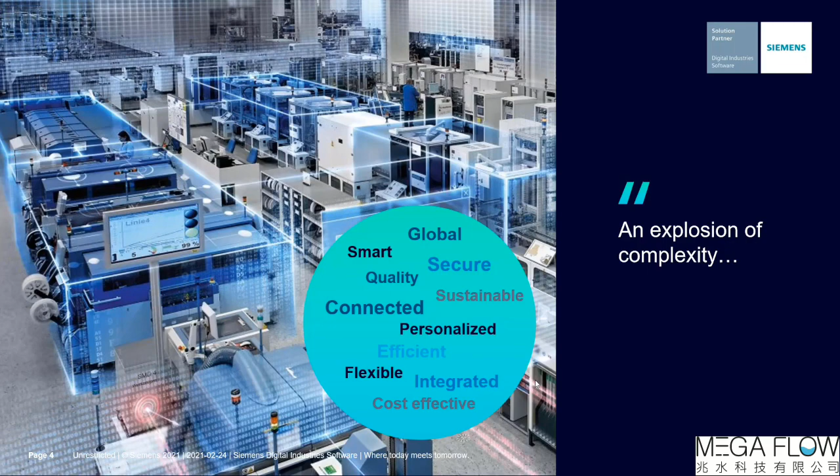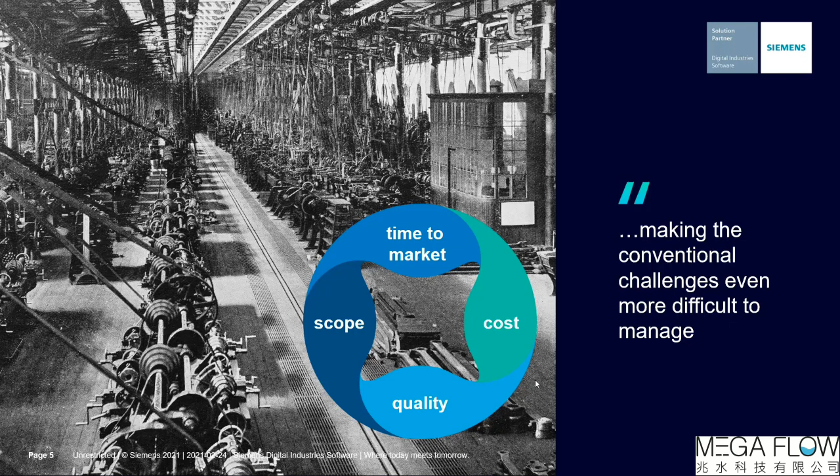Therefore, product innovation is at an all-time high, and we are confronted by an explosion of complexity to cope with those expectations. Compounding the situation are the conventional pressures of time, scope, quality, and cost. However, in the face of increasing complexity, these pressures are even more challenging to navigate. So what does this mean to the business of engineering? To quote Lee Iacocca, an engineer and leader, organizations constantly face seemingly insurmountable problems, but these also represent great opportunities.

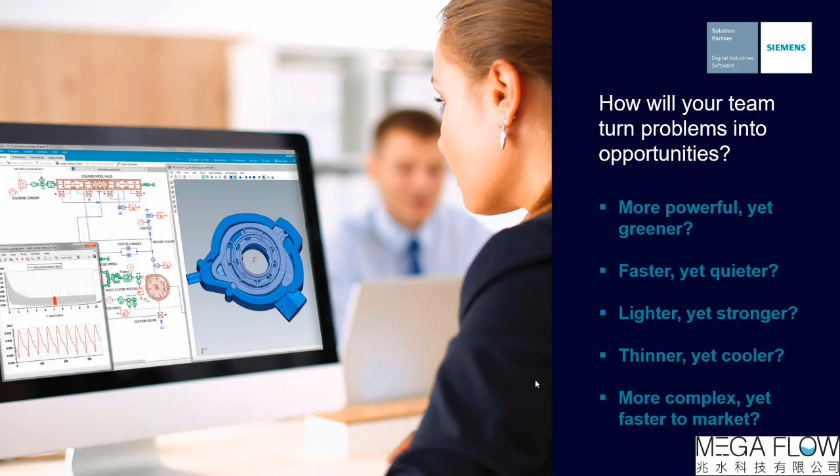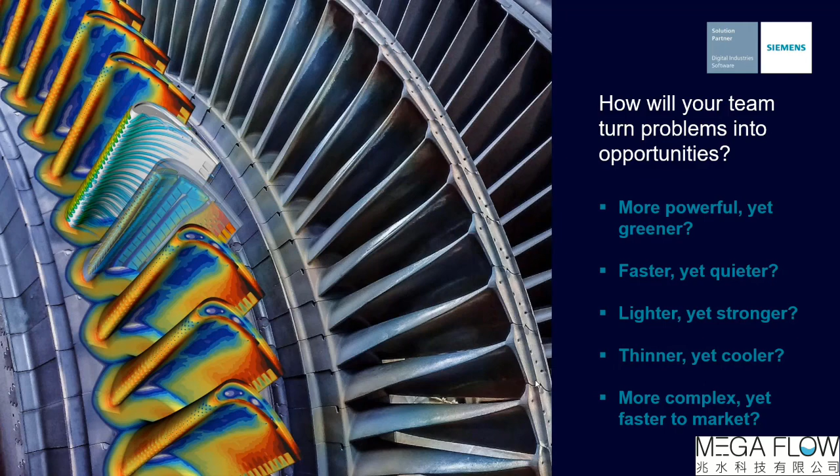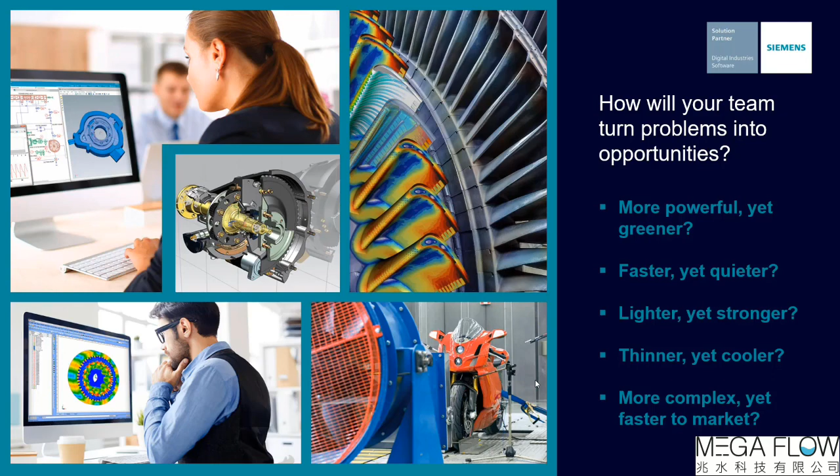So now let's move on to the next section, a new way forward. Extending that thought to your organization, you and your teams are faced with many challenges, engineering trade-offs that may seem impossible to solve, making your product more powerful yet consume less energy, making your product faster yet reducing the noise level, making it thinner yet cooler, making it more complex yet get it to market faster. So how will you navigate these trade-offs and answer the tough questions to bring innovations to market faster, despite the increased complexity?

Answering these questions requires solutions that can help predict and improve performance. This is what brings the digital twin to life. Hence, we consider simulation and test the beating heart of the digital twin. Simcenter is a flexible, open, and scalable portfolio of the best predictive tools on the market. Simcenter FloEFD is a part of this outstanding portfolio, which covers the full breadth of engineering methodologies.

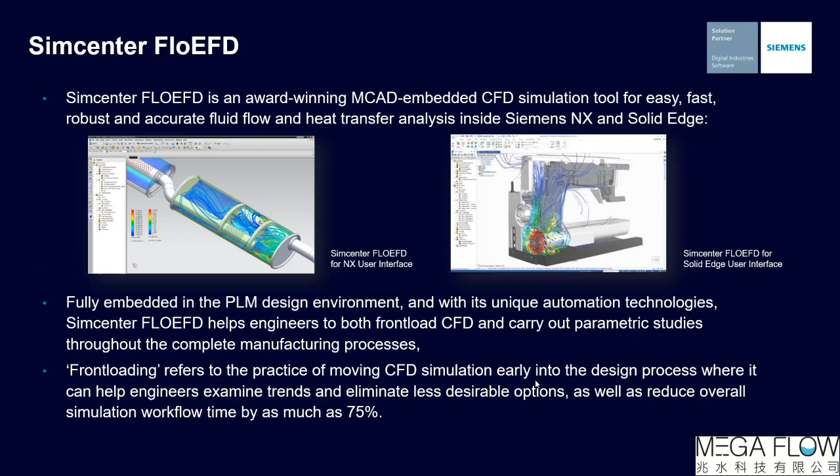So, what exactly is FloEFD? Simcenter FloEFD is a front-loading, multi-CAD embedded CFD tool for designers. Front-loading is the concept of performing your simulations earlier in the design cycle to maximize the impact and catch issues before the late-stage validation phase. It is fully embedded in the PLM design environment and has unique automation technologies.

FloEFD is a general-purpose tool which can be used in a wide range of flow and heat transfer problems. It has been specifically developed for non-CFD specialists to use to get fast, accurate results. The Mesher and Solver have unique proprietary technologies which facilitate the streamlined CAD-embedded analysis approach of this product. The result is a drastic reduction in barrier to entry and overall CFD simulation time.

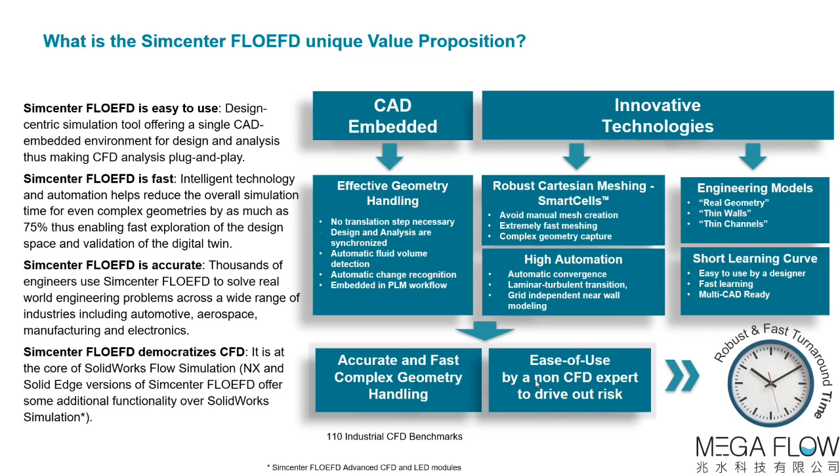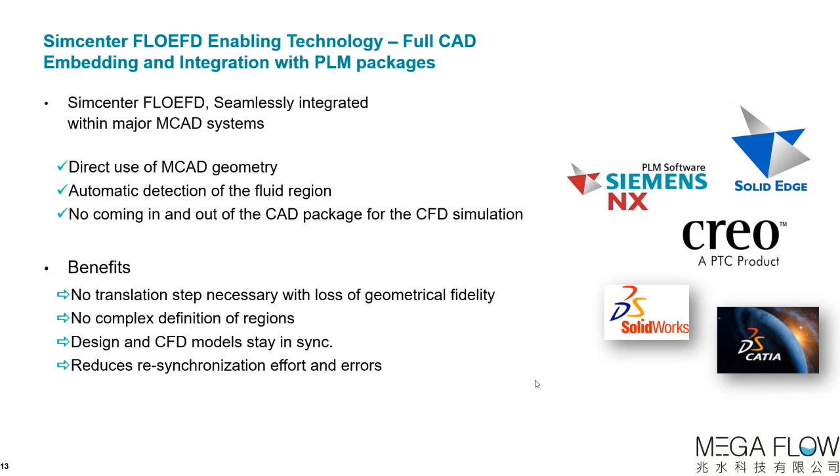We have seamless integration with Dassault CATIA V5, PTC Creo, NX, and Dassault SolidWorks. We also have links to the Inventor and Solid Edge environments. We'll be looking at the NX version in this demo, but the process is identical for other MCAD systems. The benefit of this is that there is no translation from the CAD model. Any CAD design changes are instantly reflected in the CFD analysis. Synchronization of CAD and CFD becomes a non-issue.

So now let's dive into predictive engineering analytics with FloEFD. We will walk you through 6 steps in the simulation process over the next 15 to 20 minutes. We will use FloEFD to analyze an IGBT liquid-cooled module, which can typically be found in an electric vehicle or renewable energy applications. These modules are used when large amounts of current need to be switched on and off rapidly to control a motor, for example.

The process will be geometry manipulation with the NX integration, analysis setup, meshing, solve, review the results of the analysis, and then optimize the original design and quickly create a new best simulation. So now let's see how FloEFD can improve your innovation process.

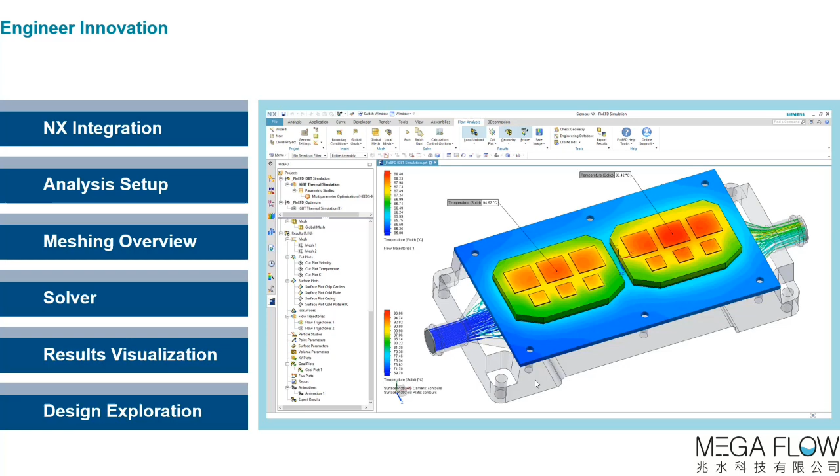The first step to be covered is the NX integration. FloEFD is natively embedded in Siemens NX. We support the latest versions of NX all the way back to NX7. This means there is no need to transfer geometry from CAD to a CFD tool.

All of the assembly and part parametric definitions are maintained, so modifications can be made easily. This is especially powerful when it comes to optimizing the geometry. Compare this with using neutral file formats like STEP, where all parameters are stripped out and you're left with a dumb solid. The fluid region is automatically detected based on an internal flow region, and this is updated with geometrical changes also. The image shows the water region detected by FloEFD.

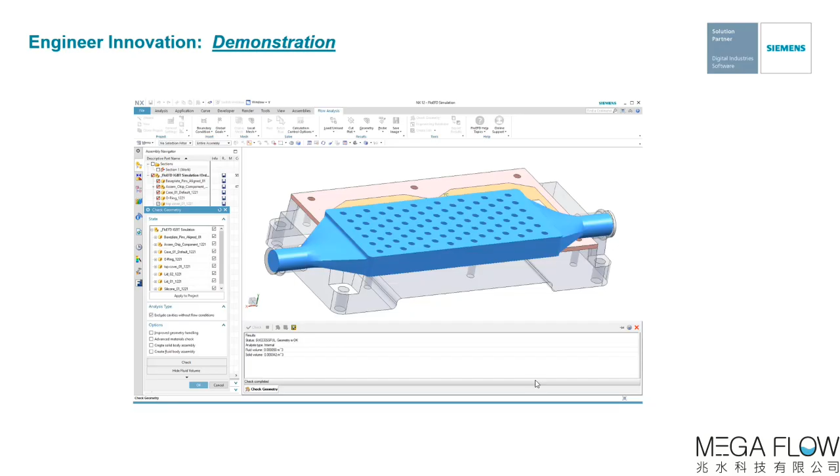Let's look at some of those features in FloEFD. So now let's go on to the live demonstration. Here is the NX interface in modeling mode currently. If we explode the assembly, we can see the parts which make up the IGBT cooler. It's important to model all the materials in the thermal path from the semiconductor to the fluid.

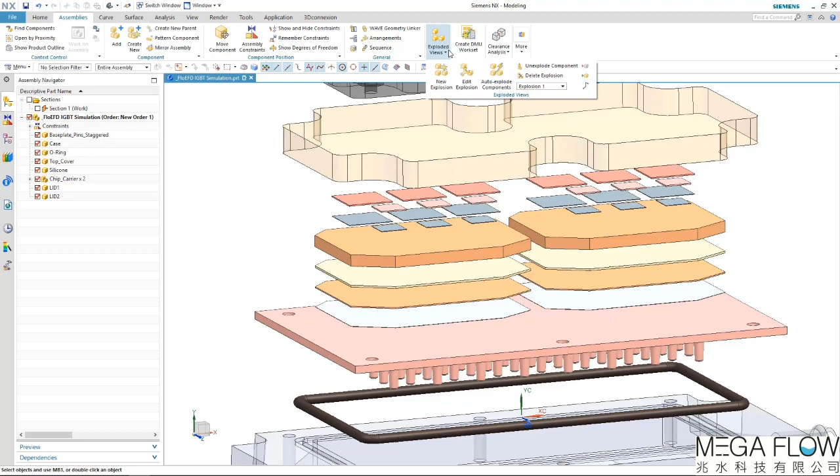We can see the silicon, the solder, the copper chip carrier, and the thermal paste attaching the chip carrier to the base plate. The casing is made of aluminum, and the whole assembly is designed to operate in vehicle underhood conditions. There is the addition of lids, which serve the purpose of closing the water region and for applying flow boundary conditions.

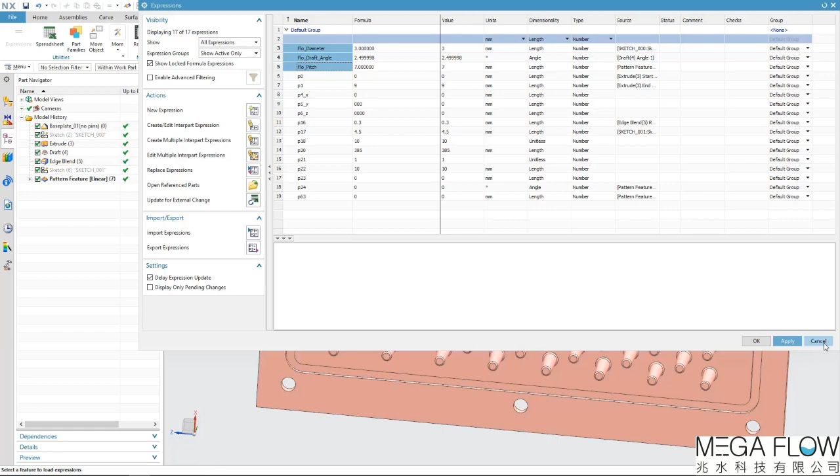Let's look at the copper base plate in more detail. If we open the part, we can see it's been designed very simply in NX using an educated guess for its predicted performance. Looking at the NX expressions, we can see there are 3 parameters controlling the heatsink pin width, draft, and pattern spacing. The model has been designed this way with later optimization in mind.

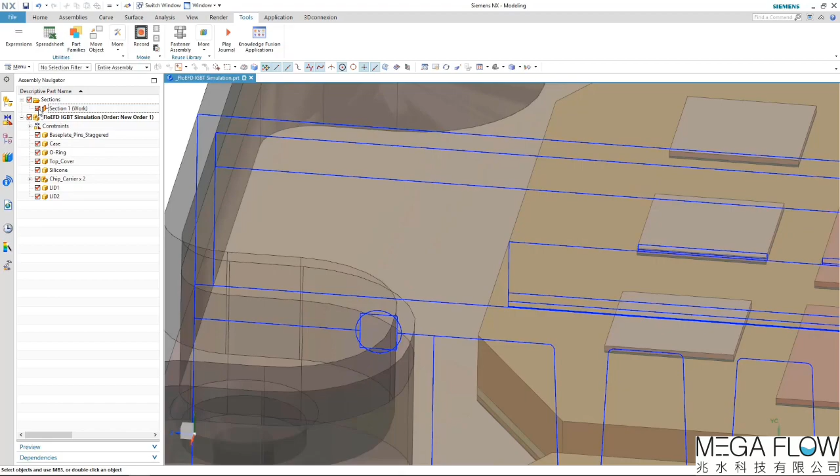Jumping back to the main assembly and taking a cross-section, we can see there are some geometrical overlaps between the parts around the O-ring and silicone potting compound. FloEFD has no issue with overlapping and dirty geometry. There is no need to spend time fixing this, just be careful with material priorities.

FloEFD is started from the menu tree under Simulation. This starts FloEFD mode and checks out the license. We can see the addition of the Flow Analysis ribbon toolbar, which is used to control the analysis. The lids on the inlet and outlet can be created automatically using the Create Lids tool.

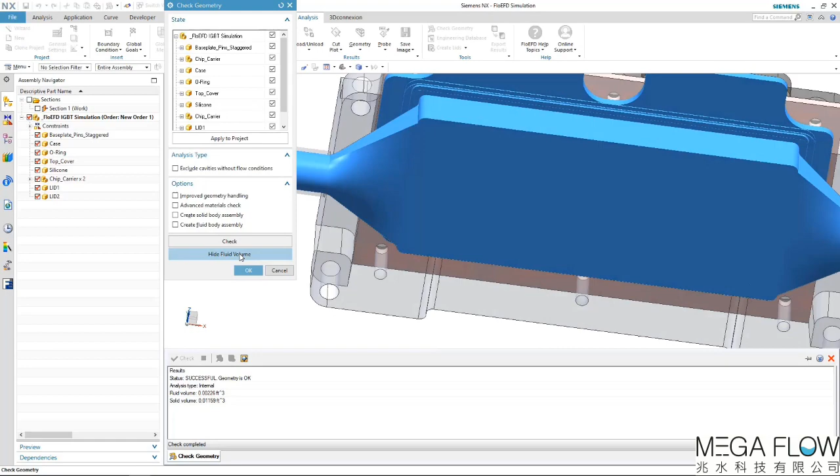Finally, let's use the FloEFD Check Geometry functionality to check the fluid region. Clicking on the Show Fluid Volume button will highlight on the screen where the fluid regions are. There are some small enclosed volumes around the O-ring which can be ignored later, but the main flow region has been detected correctly. This fluid volume part doesn't need to be created in NX. It is automatically created and updated. The geometry is now ready for FloEFD analysis.

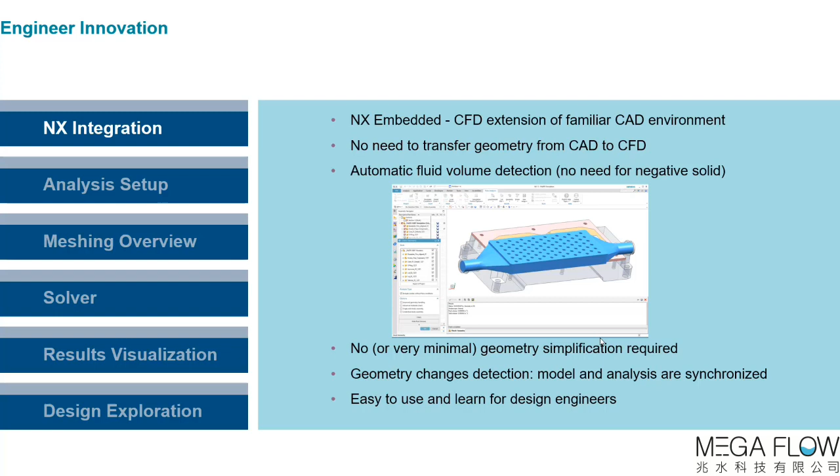So the benefits of having an NX embedded approach are that there is none or minimal geometry simplification necessary. Geometry changes are detected and the project is updated automatically. The tool is easy to use for existing NX users as it's just an extension of the CAD tool.

So what we just saw was the NX embedded nature of the software and how designers can leverage pre-existing NX models to perform a CFD analysis. The familiarity of the NX interface and FloEFD being a logical extension makes the tool easy to use for the NX designer.

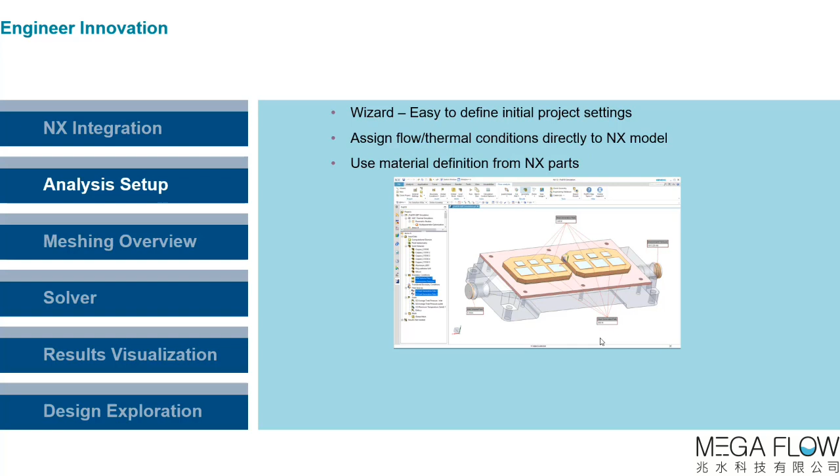So now that we have prepared and checked the geometry, we're ready to set up an analysis on the assembly. The FloEFD project is created using a wizard-driven process. Flow and thermal boundary conditions are applied directly onto the NX parts. If materials have been applied in NX, these can be imported directly into the FloEFD engineering database. So now let's go on to the live demonstration.

Let's start the wizard and look at the steps. The first step is to name the project. We can also see that the project can be created on the NX family of assembly members if needed. This project is an internal analysis, as the inlets and outlets are well defined. The exclude cavities without flow conditions option is enabled to ignore the previously seen cavities.

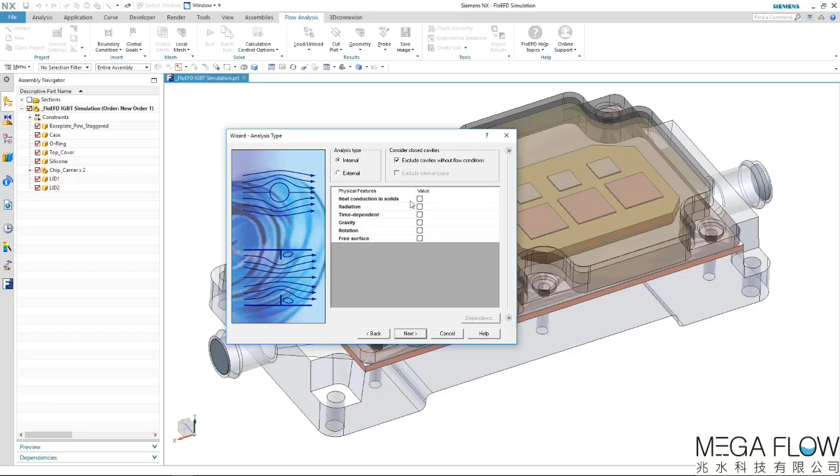Heat conduction in solids is enabled to consider conduction and convection. Water is chosen as the working fluid. The wall conditions are left at adiabatic to ensure all heat is transferred to the water. The ambient temperature is set to 65 C to replicate under-hood conditions.

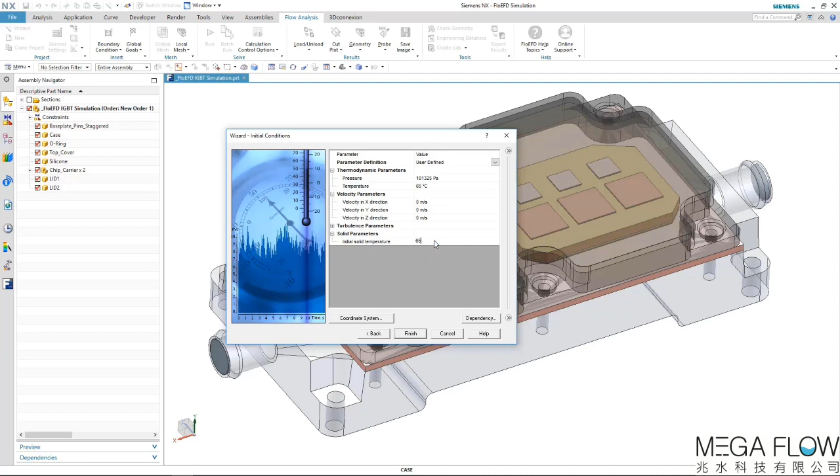Once the wizard is finished, we can see the computational domain around the assembly, which has been sized automatically based on the wizard selections. Let's quickly import all the NX materials which have been assigned. The assembly is scanned and we can accept the detections.

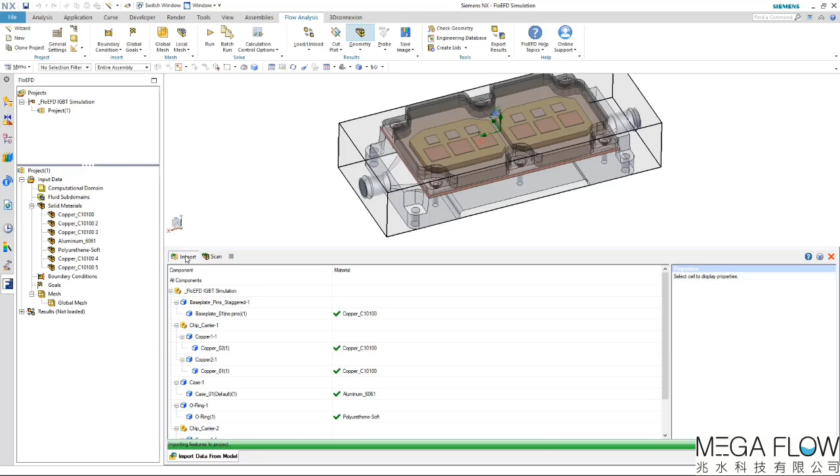Materials can also be applied manually. Here we're applying silicon on the chips themselves from the independent FloEFD materials library. This is useful as not all NX material definitions have temperature-dependent properties.

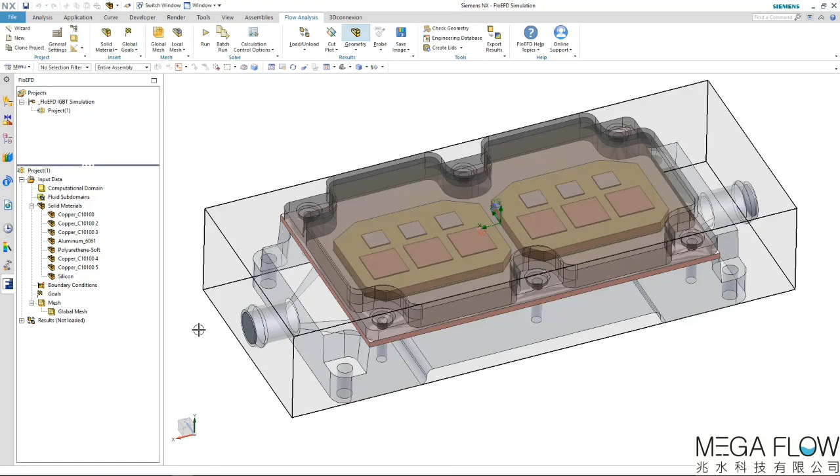Next, we'd like to assign the water flow conditions using a boundary condition from the ribbon. A volume flow rate of 1.5 gallons per minute is applied to the inner face of the lid we created earlier. The thermodynamic properties show the inlet water temperature of 65 C.

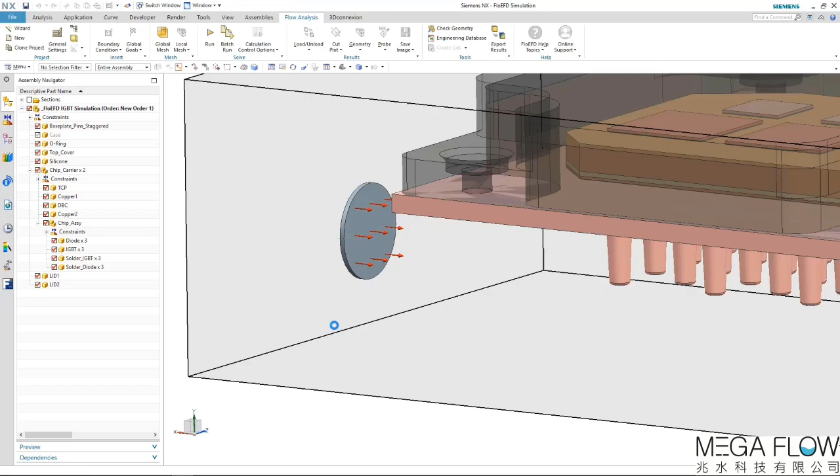In a similar manner, an outlet pressure condition is applied to the other lid. This will allow the water to leave the system and gives a known pressure condition.

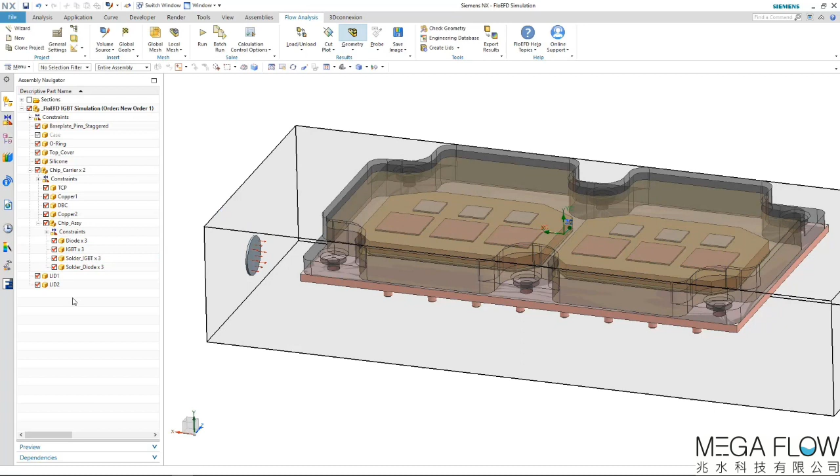A volume source is used to apply a heat load. Multiple parts can be selected at once and the power will be split across the bodies. We'll apply 360 watts on the IGBTs and 144 watts on the protection diodes. Like this, other FloEFD features can be applied directly onto the NX geometry.

The FloEFD project is initialized with a wizard and can be applied at any stage of the design process. The engineering database can be shared across a team to ensure consistency. FloEFD data can be reused and persistently associated with a part if desired. Projects can be cloned and templates created to standardize the analysis setup stage.

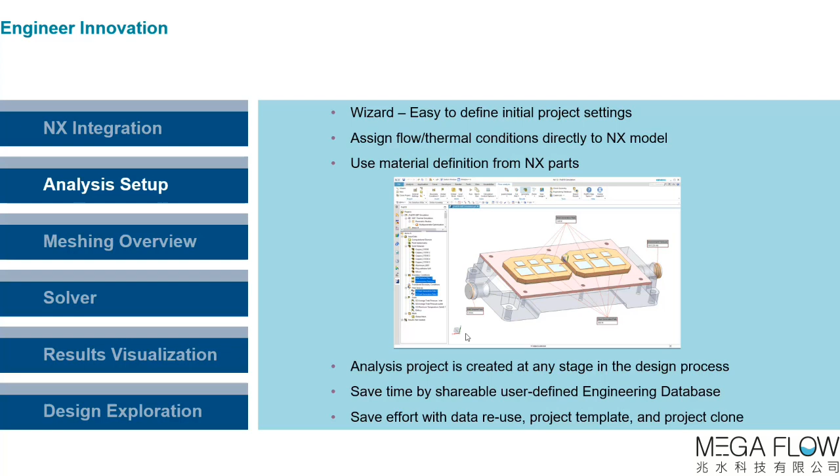So, to recap what we just saw, the analysis setup is performed in NX using a wizard-driven process. Analysis boundary conditions are applied onto the assembly parts and features. The benefit of this step is that it's quick and intuitive to set up an analysis for the design engineer.

So, traditionally, one of the trickiest and most time-consuming aspects of CFD has been the geometry meshing stage. The fluid and solid regions are discretized into grid cells, which is then passed on to the solver for solution. It's normally at this stage that requires the geometry to be simplified for meshing, or simulation compromises have to be made for the sake of solution time.

FloEFD uses proprietary smart cell technology to alleviate a lot of the issues associated with the old way of doing things. Smart cells can have multiple fluid and solid control volumes to simplify the mesh generation step. Complex CAD models are meshed with minimal user input using an automatic mesher. Solution adaptive mesh refinement can even increase grid density mid-solve based on local flow gradients.

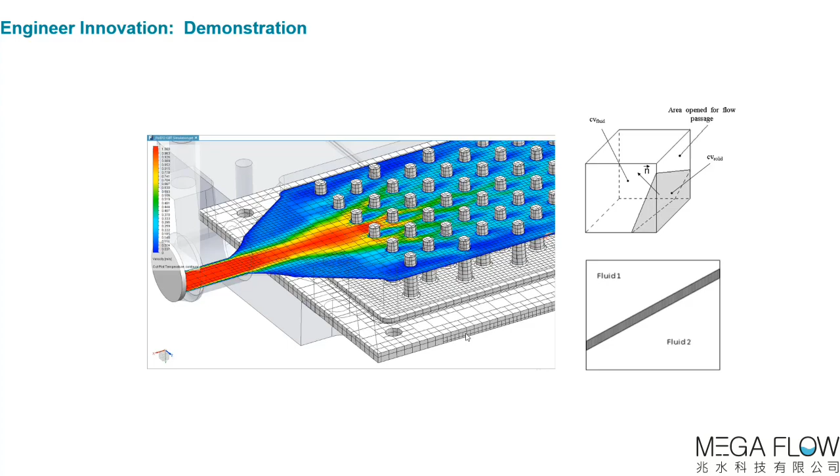So now let's go on to the live demonstration. If we go normal to the screen in NX, we can show the global mesh settings for FloEFD. At present, the automatic mesh is applied at level 4. We can move the slider to increase or decrease the global mesh density. FloEFD uses a finite volume method on a Cartesian grid to solve the Navier-Stokes equations.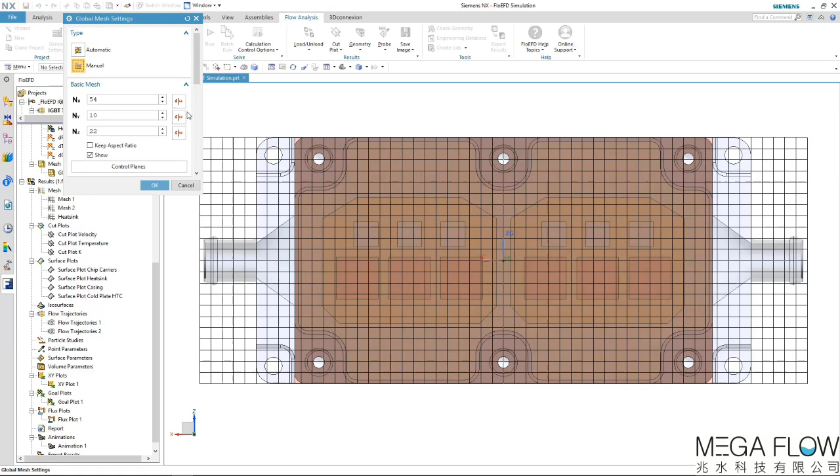The mesh on the screen is only the base mesh before any cell subdivision has occurred, and is visualized to give the user a rough idea of how fine the final generated mesh will be. The mesher can be switched over to manual settings if desired, where cell sizes and refinement settings can be accessed. User-defined local initial meshes can be employed to manually apply finer grid on specific parts and areas in the model.

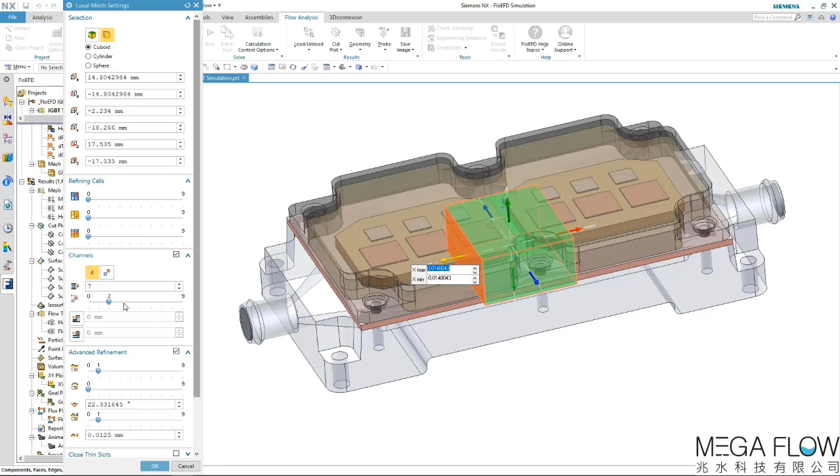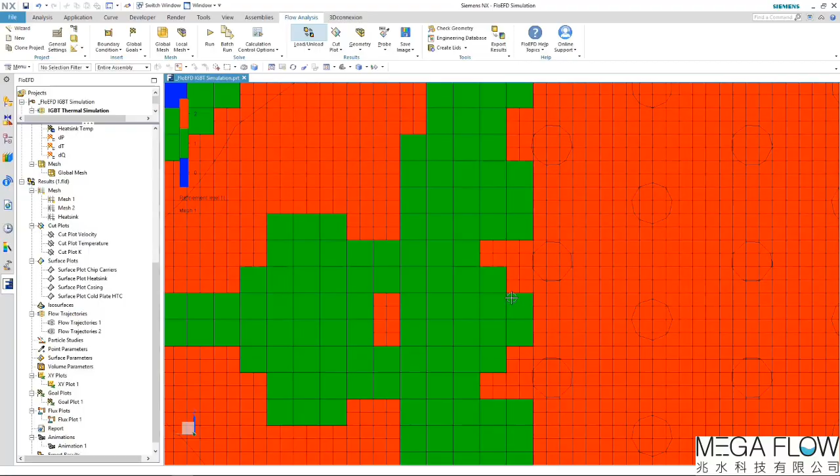The mesh has already been generated for this model, so now let's have a look. If we zoom in around the base plate pins, we can see a finer mesh around the heatsink where the flow is constricted. The current plot is colored by levels, which can range from 0 to 9. Octree refinement is employed to split a single base mesh cell into 8 smaller cells to increase to the next mesh level. This can happen up to a maximum of 9 times to create exponentially smaller cells.

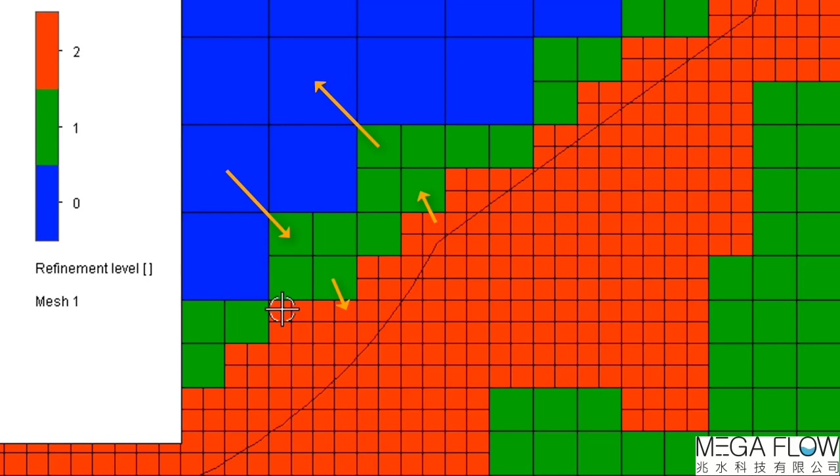This Octree method performs 2 important tasks. First, the aspect ratio of every cell is identical. The smallest cell has the same aspect ratio as the base mesh. The second is that the growth ratio is restricted to a single level to avoid very small cells transitioning into large cells. These are both important for solver robustness and convergence behavior.

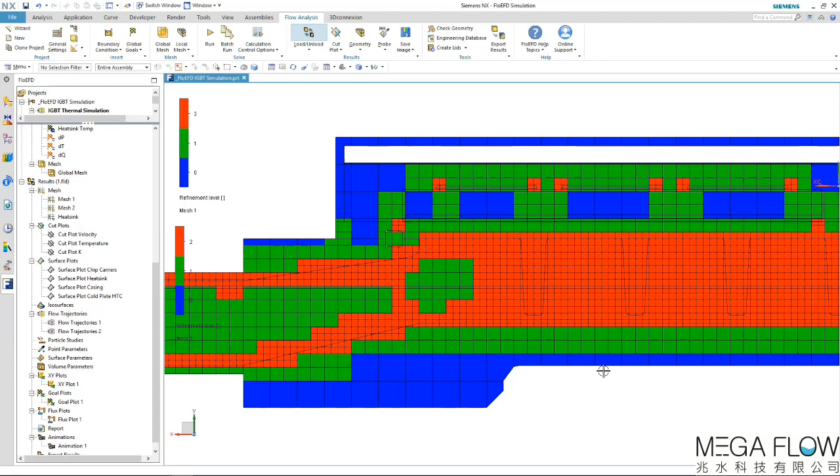The smart cells are always found at the interface between fluid and solid. This is where the boundary layer forms and the convective heat transfer occurs. Smart cells can have multiple control volumes, up to 12 in a single cell. It's this technology which makes FloEFD meshes easy to generate and tolerant of dirty CAD geometry.

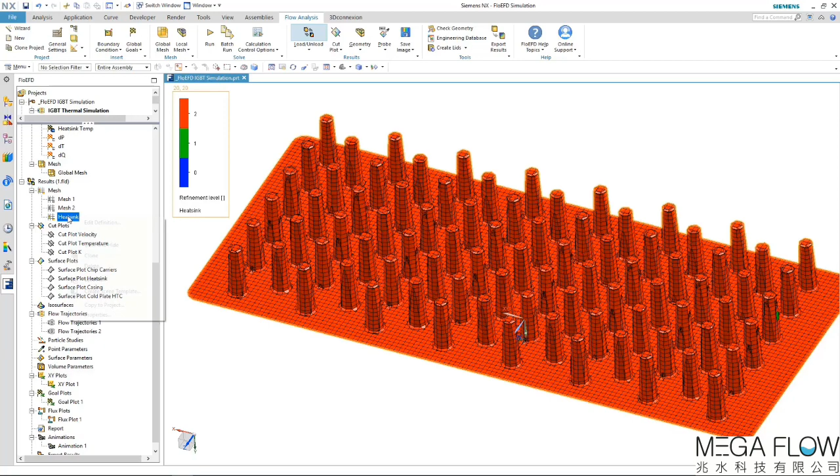If we plot the surface of the heatsink base with mesh, we can see the smart cells which touch the water region. Proprietary wall functions are used in the smart cells to apply the boundary layer. FloEFD uses the K-epsilon model for the bulk flow turbulence and an empirical engineering model for the near wall effects, which have been calibrated over a wide range of Reynolds numbers.

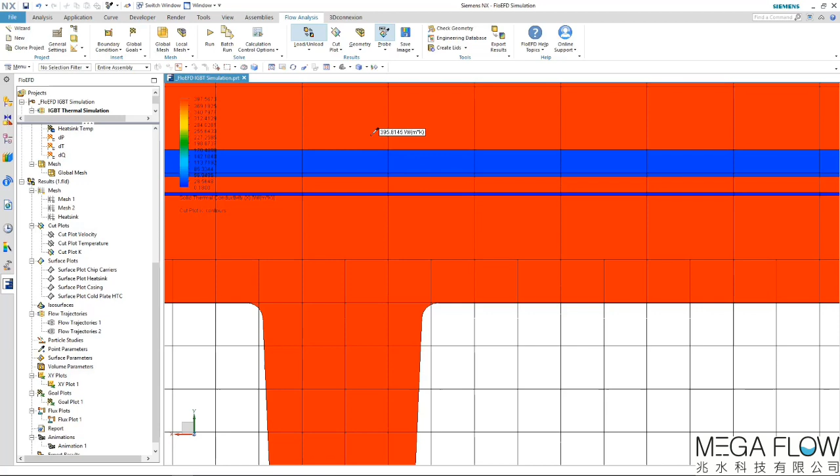Now let's have a look at the solid conductivity in a 2D plot through the model. A smart cell can have multiple solids within a single cell, up to 36. This makes resolving thin solids, such as thermal interface materials, very straightforward and easy. When overlapping parts exist, such as between the sealing O-ring and the base plate, there is a material hierarchy which can be edited to get the correct material dominance.

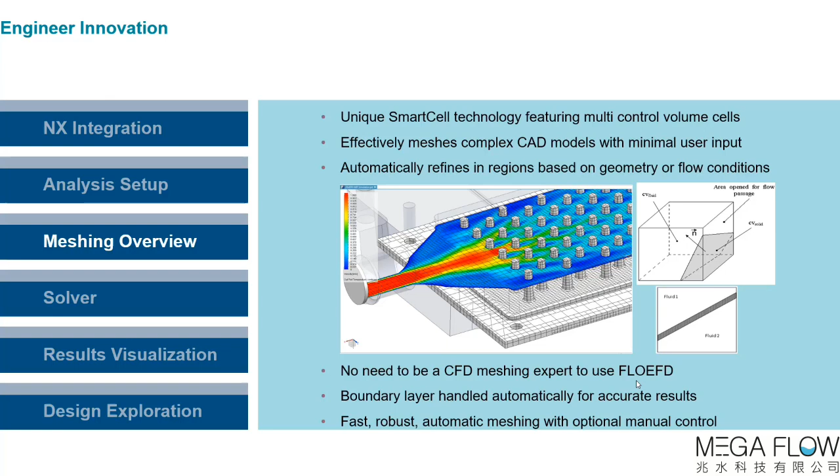The benefits of FloEFD's unique mesher are that it's very simple for a non-expert to generate an accurate grid. The boundary layer is handled automatically without the high cell count requirement at the wall. The mesher has a default automatic setting which can be augmented with manual conditions if desired.

So to summarize, we saw how FloEFD discretizes the domain into finite volume grid cells using an immersed boundary approach. The FloEFD smart cells remove a lot of the complexity of meshing, which has traditionally been a stumbling block to reliable CFD results. FloEFD removes these barriers and allows non-experts to generate a robust mesh.

So now let's have a look at some of the features of the FloEFD solver next. FloEFD uses its own proprietary solver similar to its own mesher. It exhibits very robust convergence behavior due to some of the features covered in the meshing section. The classic 3D CFD solving approach is employed, which is augmented with engineering models to provide empirical correlations. This is especially pronounced in the boundary layer treatment.

Wall functions are used in conjunction with the smart cells at the boundary layer, which means a coarse grid can be used at the wall without any consideration for Y+ tolerances. All of this technology is implemented without requiring any user input, again to reduce simulation complexity and promote ease of use. User-defined engineering goals can be specified to extract key performance data and are also utilized to monitor solution convergence.

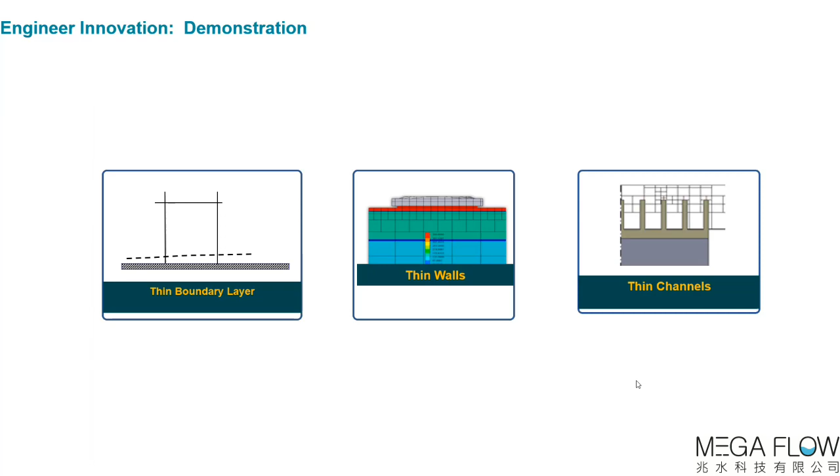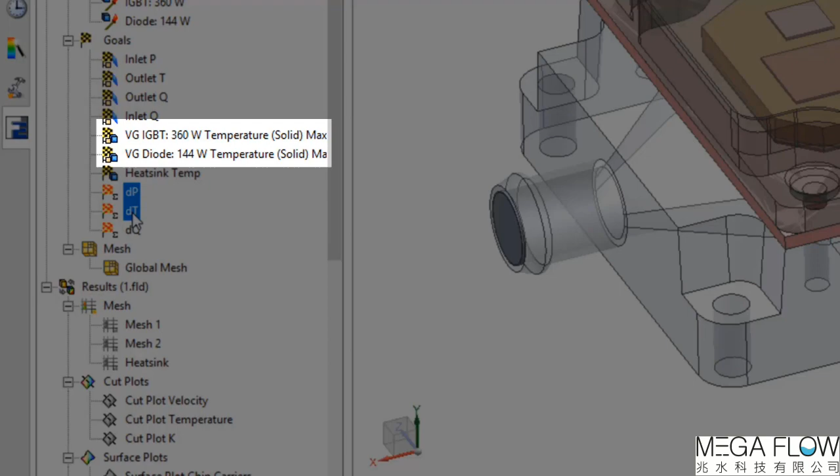Volume goals are used to monitor the maximum temperature on the IGBT and diode parts, as these will be the hottest components in the model. The equation goals are at the bottom and are manually created to easily digest the deltas between the goals. During the actual solver execution, the usual Navier-Stokes equations are being solved to ensure conservation of mass, momentum and energy, but the solver is also checking the goals to ensure steady-state convergence behavior before the solver will stop. The convergence criteria can be adjusted for user-defined accuracy.

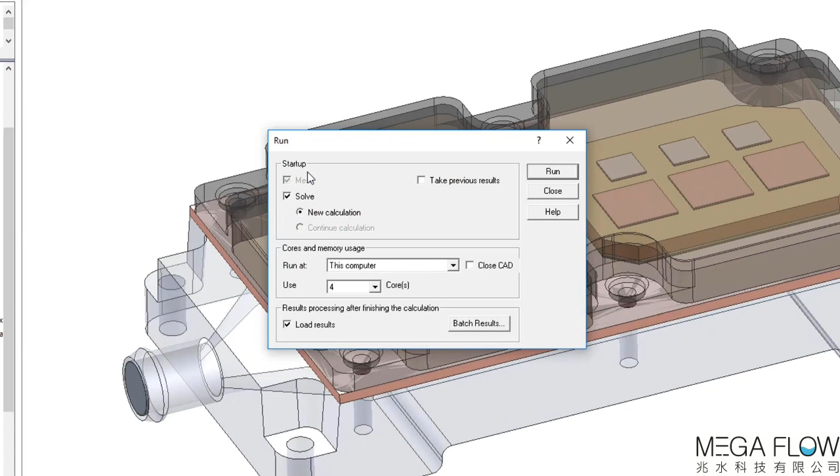If we look at the solver options, we can see that the mesher needs to be run before the actual solver. The mesher and solver are both parallel compute enabled and can utilize as many CPU cores as needed. This is by default and requires no additional license. The FloEFD license is also network floating by default, which means the CPU-intensive solving process can be offloaded to a dedicated solving machine or server.

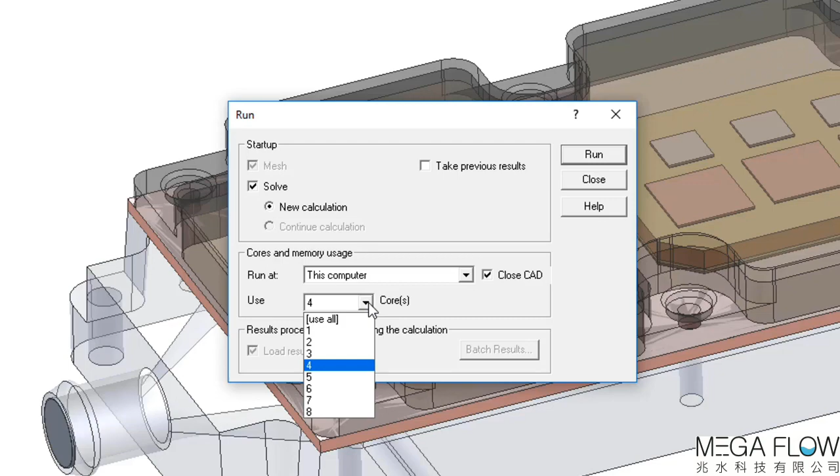The option to close the CAD is available, so the NX license can be freed up if the solve will be long. While the solver is running, the goals can be monitored graphically to ensure sensible results, and preview plots can be created to ensure results confidence.

This particular model takes about 5 minutes to generate a mesh for and about 20 minutes to solve the convergence.

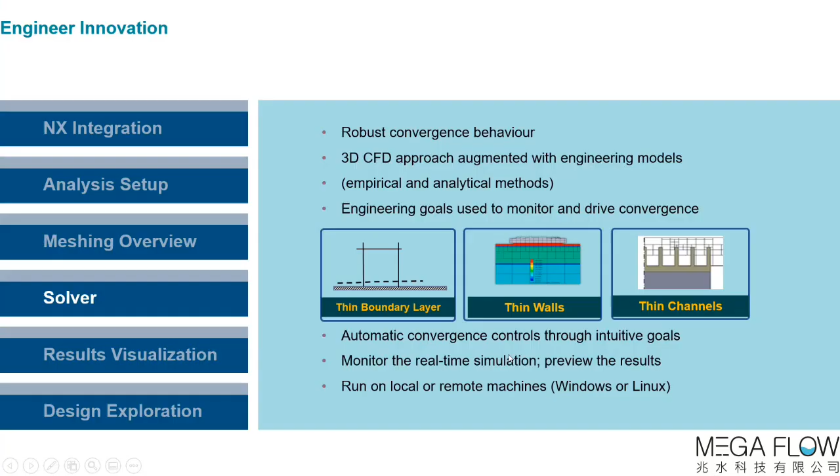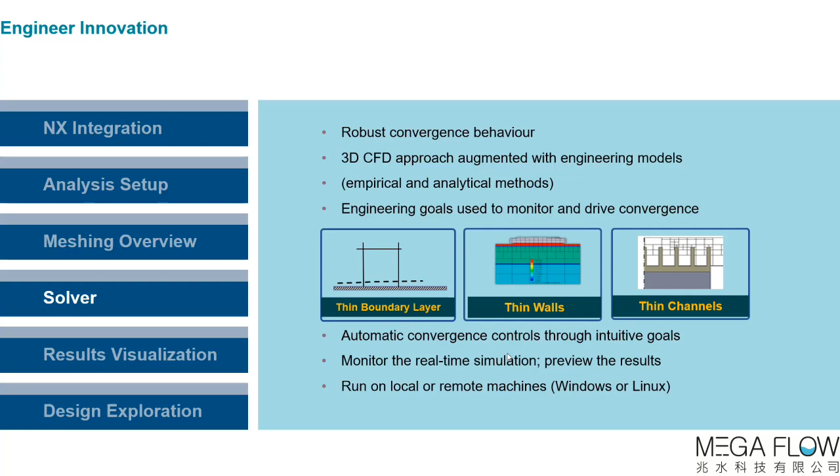The benefit to the user of the FloEFD solver is that there is automatic monitoring and convergence behavior using intuitive goals. The solution can be monitored in real time to ensure results are sensible, and there haven't been any errors setting the model up. The solver can be run on a remote machine to free up local resources.

To summarize what we saw, the solver has many unique features which ensure reliable results. The solver exhibits robust convergence behavior driven by user-defined goals. The process is seamless and the user can expect quick, accurate results with minimal manual intervention.

Everything we've seen up to this point has been done so that we can produce the results necessary to predict the product performance. Similar to the FloEFD pre-processing, the post-processing is performed within NX also for an intuitive user experience. Flow and thermal results can be visualized directly on the NX assembly, and we can create various plot types. Numerical performance data can also be extracted in Excel and Word format for maximum flexibility.

So now, let's go on to the demonstration.

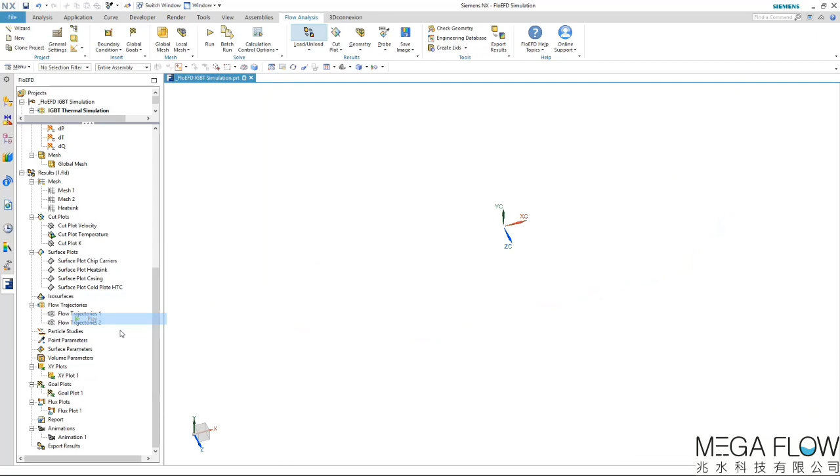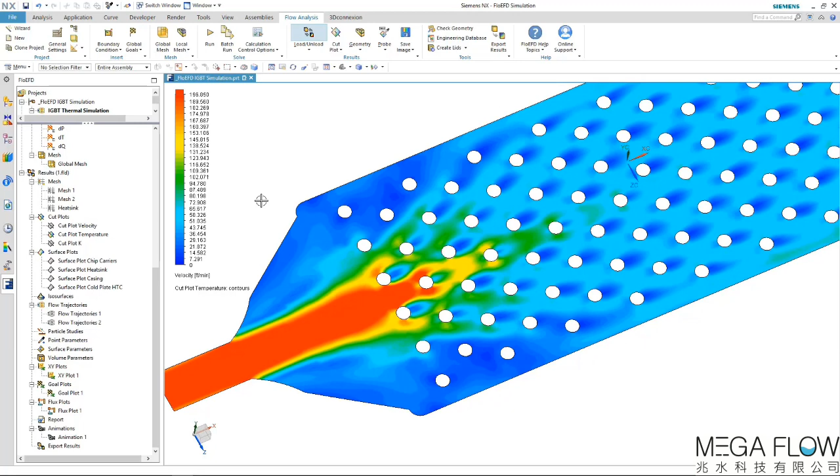It's easy to change the parameter to velocity, and we can see the flow winding through between the pins. We can also visualize the pressure variation, which gives us an idea of the pressure drop across the unit at this prescribed flow rate.

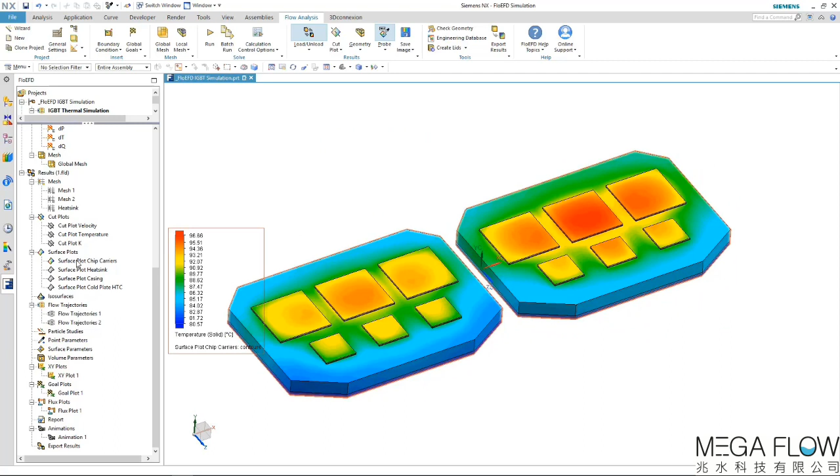Surface plots can be used to look at temperature variations. We can see the chip carrier temperature with the hottest region on the silicon dies. If we color the heatsink, we can see the cooler region in contact with the water.

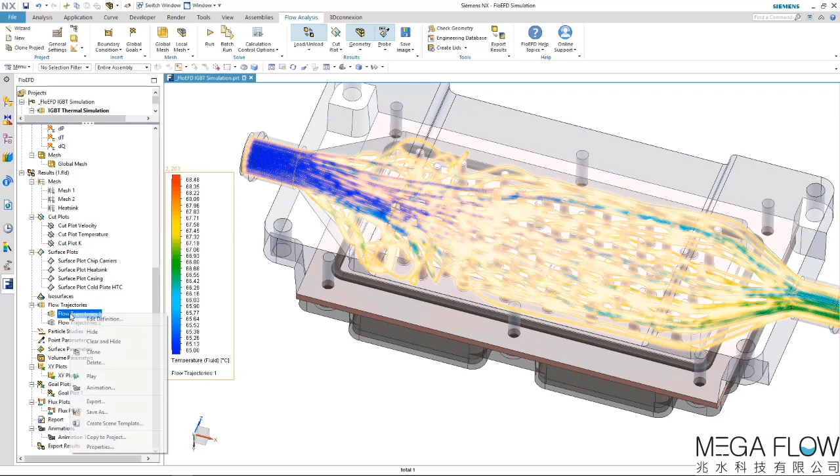Flow trajectories can be used to see how the flow moves through the fluid region. The flow can be animated and exported if desired. Animating the flow is useful for detecting recirculation zones or areas of high flow velocity.

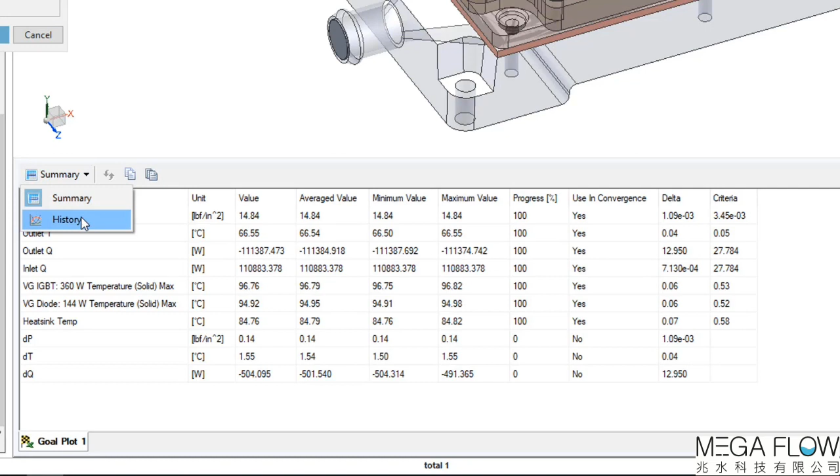The goals which are used for convergence can be plotted on the screen showing the final steady-state values. We can also see on the graph the convergence behavior of the goals with iterations on the x-axis. The goals are smooth and plateaued, indicating a converged solution. The data can be exported to Excel for further data analysis.

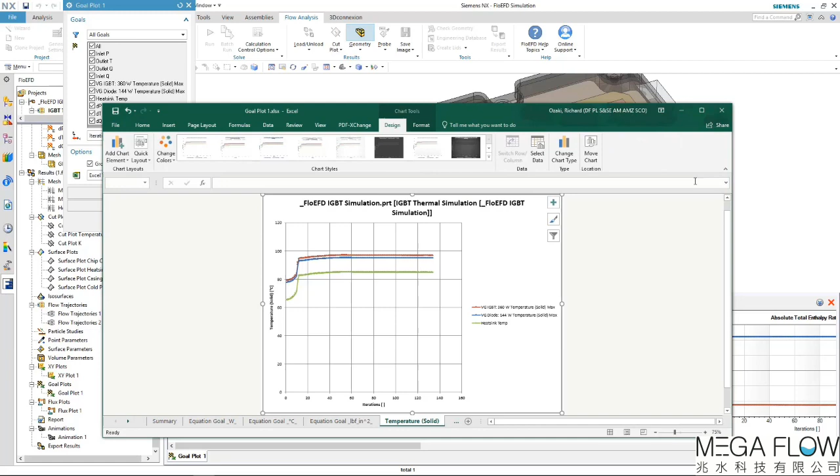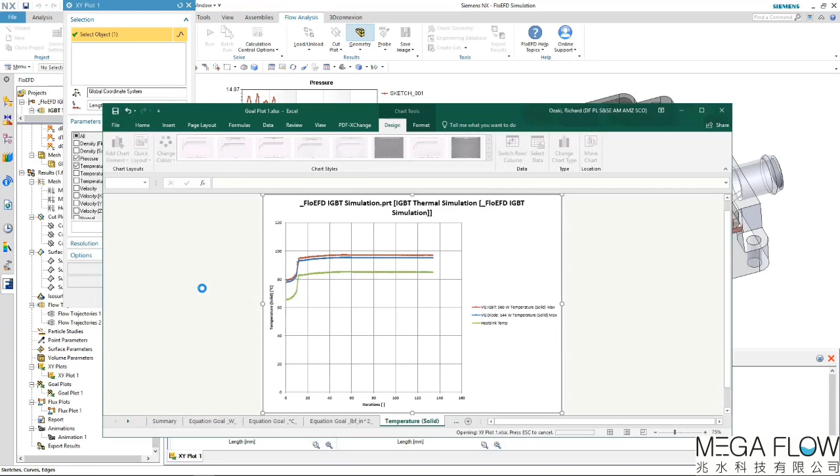NX sketches can be created and used for results extraction, even after the solver has been run. Here we have a line along the bottom of the flow region, and we can plot the pressure and temperature change along the path. Again, the data can be exported to Excel for further processing.

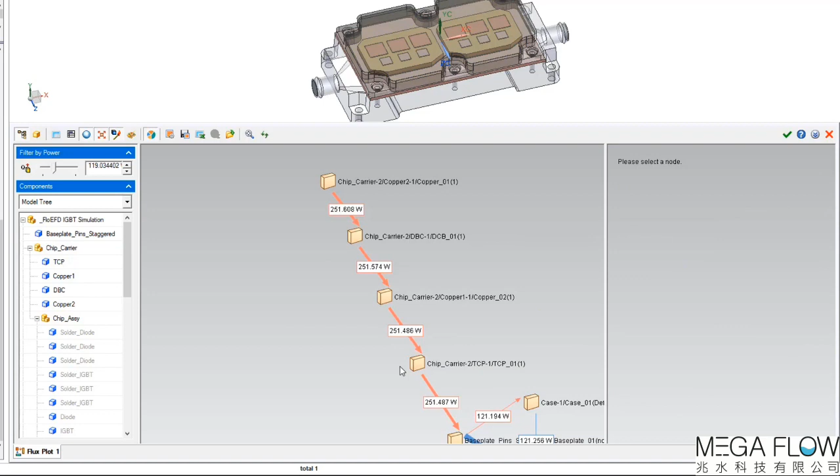A new feature is the flux plot, which is a novel way of visualizing heat fluxes between NX parts and assemblies. If we create a flux plot on the heatsink, we can see how much and where the heat is flowing into and out of the heatsink.

The power filter is used to show where the power is coming from and how it eventually all goes into the fluid subdomain.

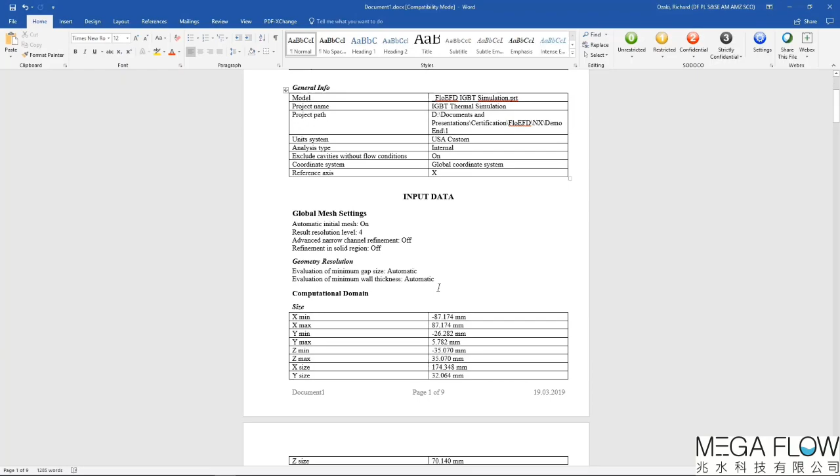A report can be created based on templates, which can be customized to export only selected data if required.

FloEFD results can be exported to FEA, including Simcenter 3D and FEMAP for fluid structure interaction co-simulation.

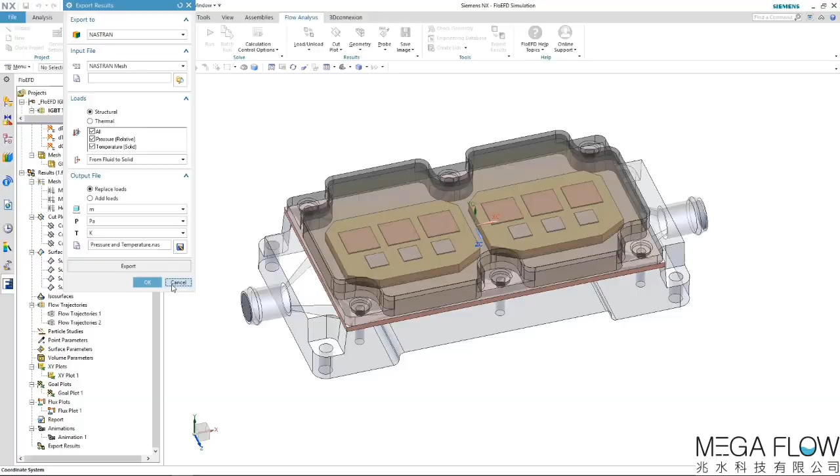There is also a free, unlicensed FloEFD results viewer called FloEFD View, which can be used to look at results completely divorced from the NX UI.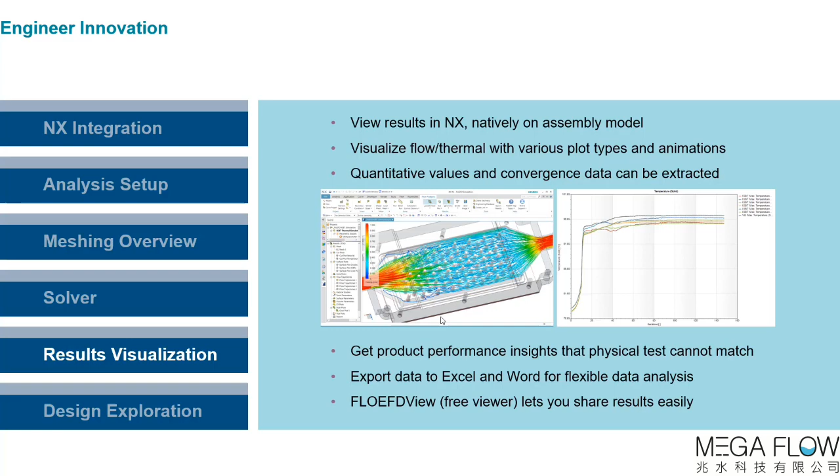As we've seen in looking at the results, FloEFD allows you to visualize performance in a way physical test cannot. You can really interrogate the results and get to the root cause of a flow or thermal issue. The data can be exported easily to Excel and Word in a standardized format for comparative use. A free unlicensed viewer is included on the installer image for sharing results with customers or internally.

To summarize, FloEFD makes looking at the results very easy for the user, as it's simply an extension of NX. The data can be seen visually with plots and streamlines or be exported to Word and Excel for quantitative analysis. Either way, the key performance data can be easily evaluated and used comparatively to guide engineering design decisions.

So now let's look at the sixth and final step in our demo, which is design exploration. Design exploration is the process of augmenting the base case simulation to look at variance and ideally optimize your design.

As FloEFD is NX embedded, we can leverage NX expressions directly as input variables. Alternatively, the project can be cloned onto a predefined family of assembly variants. There are several parametric study options available for looking at scenarios based on simulation or geometric inputs.

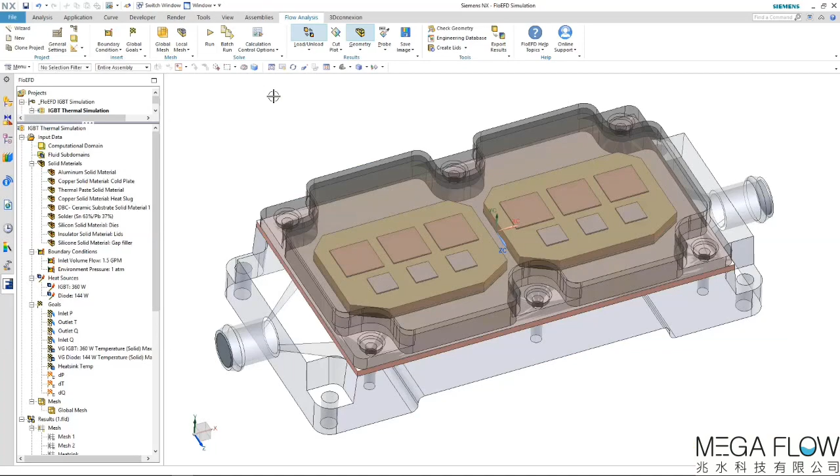So now on to the live demonstration. Let's start the parametric study from the ribbon toolbar. As we can see, there are various options available depending on what needs to be achieved.

The design of experiments and optimization is a FloEFD native optimizer which uses a brute force approach to seek an optimum. A new optional module is the HEEDS optimizer, which has a more intelligent algorithm.

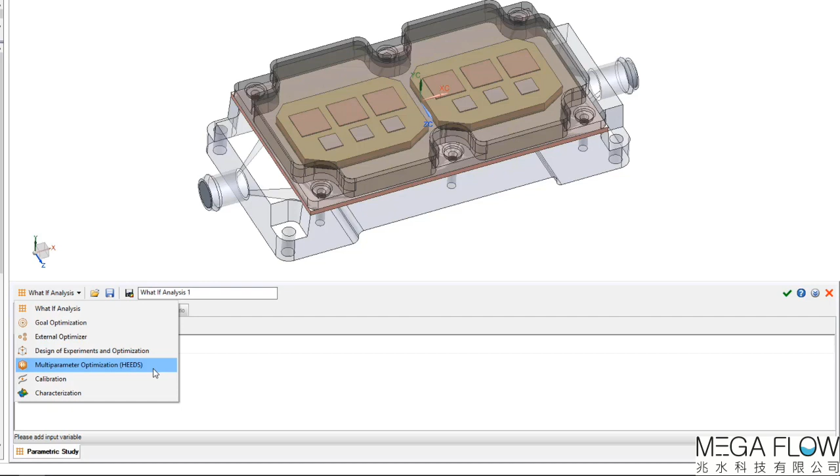The first tab is the Input Variables. We can select simulation inputs, NX expressions, assembly constraints, or part family parameters. Let's choose the NX expressions.

We saw right at the start how the base plate was designed with expressions controlling some of the features. Here is where we can select the three parameters of interest: the diameter, draft angle, and pitch of the heatsink pins. We then need to give a min-max range for each of these inputs.

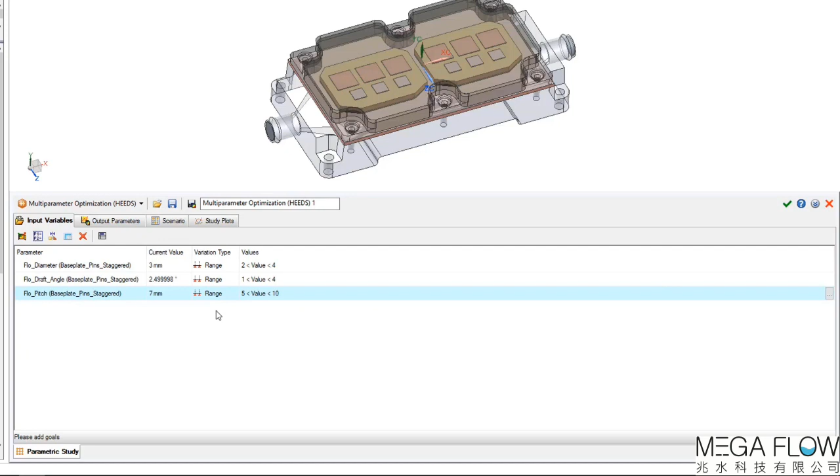In the output variables, we can select the goal we'd like to optimize on. For this, I'm selecting the maximum IGBT temperature, which we'd like to minimize, and the delta P, which we'd also like to minimize. We can also define some constraints here if there are any engineering guidelines for operation. For example, the cooler cannot have more than a 0.17 psi pressure drop.

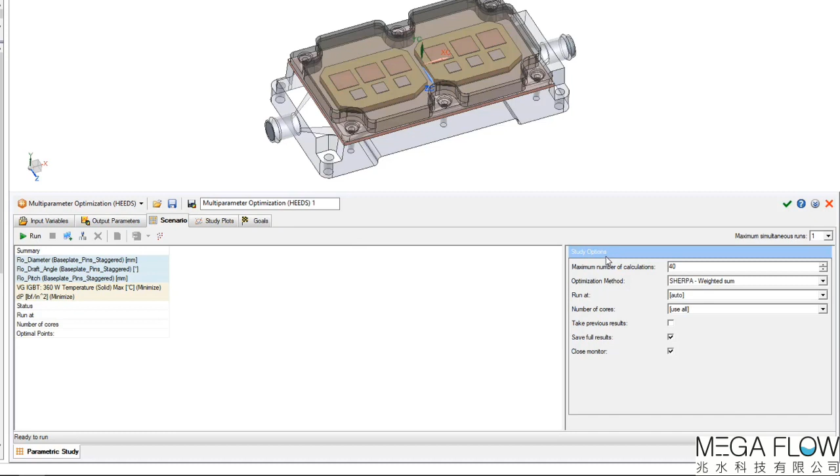Finally, the scenario table allows us to select the optimization algorithm. As the delta P and maximum temperature are opposing goals requiring a compromise, we use the Pareto front to find an acceptable operating point. The software will then run 40 scenarios to calibrate the input variable sensitivities.

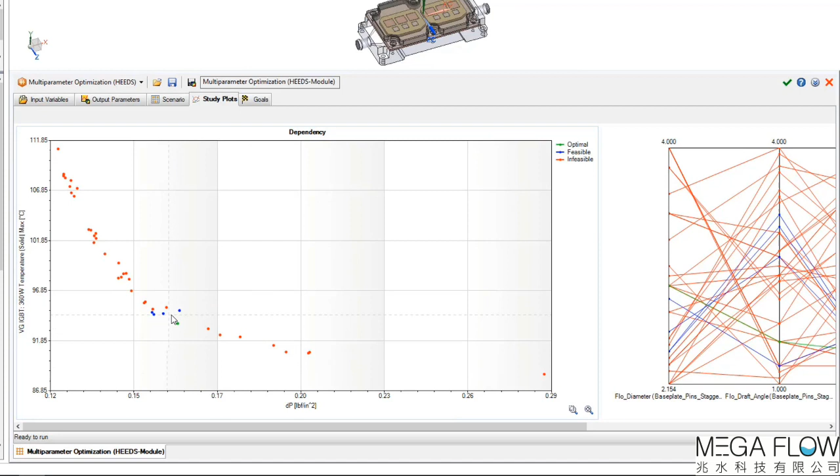Upon completion of the 40 runs, we can see the study plot showing a graph of the two output variables. The software has identified some feasible points and also an optimum scenario, in our case, number 37. We can right-click and create this project in FloEFD as the optimum.

Jumping over to this design, we can see the denser pin arrangement but steeper draft angle for freer flow. This optimized variant has been saved automatically.

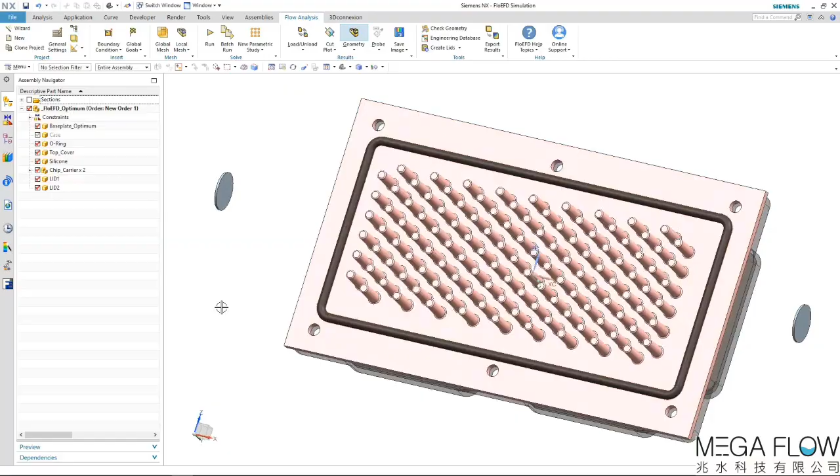Performing the parametric study allows the user to quantify the difference a design change has, and this has tangible benefits on product operation.

What we just saw was the use of the optional embedded HEEDS optimizer, which has market-leading intelligent optimization algorithms built in. The user can select input variables and the software will determine the best combination of them. The optimum can be saved as a new NX assembly member.

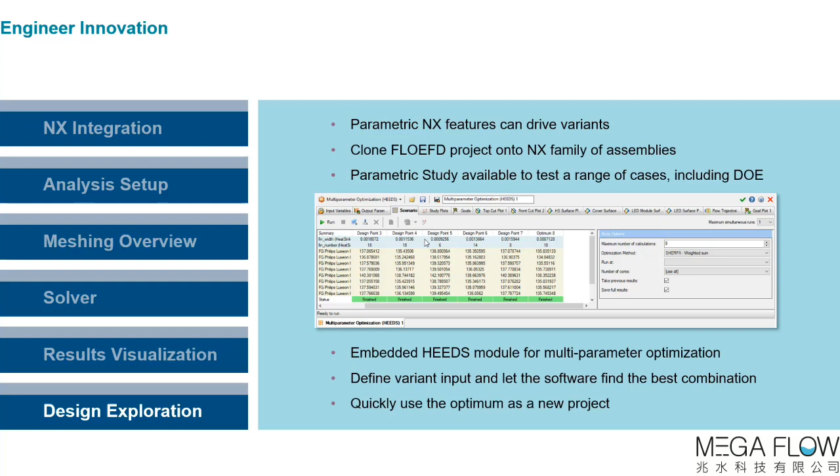To summarize, FloEFD allows users to perform simulation variants intelligently to quickly identify the best operating point. Not leaving the CAD means that the geometrical inputs are available for variation rather than an exported step file which has no feature tree.

So now let's look at a customer success story.

Mitsubishi needed a methodology to simulate the cooling and mechanical effects of a new nozzle, specifically liquid-cooled nozzles for cutting tools. They needed answers to the following questions: Would it produce enough cooling? Would the nozzle component be durable enough? As such, engineers and designers assembled an array of computer-aided engineering tools to virtually test the new design.

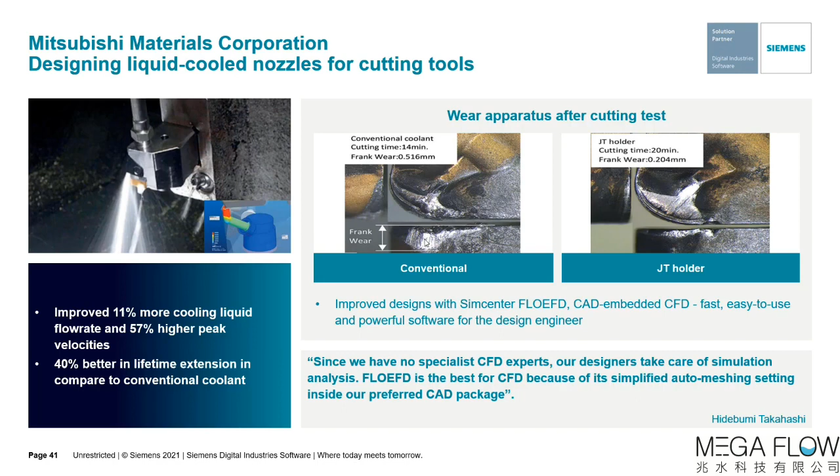For fluid flow and heat transfer analysis, they decided to use Simcenter FloEFD software. By utilizing FloEFD, the customer was able to obtain the following: improved 11% more cooling liquid flow rate and 57% higher peak velocities.

Finally, let's move on to removing barriers to innovation. In conclusion, bottom line, FloEFD is easy, fast, and accurate. The features shown today highlight what makes FloEFD an easy-to-use, designer-level analysis tool for front-loading CFD analysis.